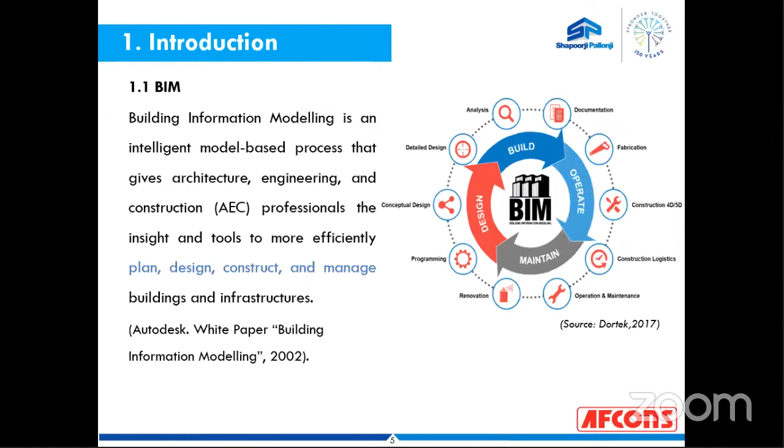Okay, then these 3 letters, BIM. I would like to explain the 3 letters BIM in brief detail. B stands for building - it could be residential, commercial, infrastructure, or healthcare buildings. It might be an infrastructure project, commercial project, or residential project.

Coming to the information, in our construction project there is various information. For example, spatial information, like at what coordinate your project is placed, the dimension details of various sections. For my current project, Samruddhi, there are viaducts - so what are the details of the bridge, what is the size of pier, foundation details, which components contain which kind of material, and quantities of those materials. If I have a foundation, how much quantity of concrete and steel will be there - I can provide these details to the model itself.

Then schedules - usually in a construction project we prepare schedules using Primavera, MSP, or sometimes Excel. Those schedules can be linked with your model, and based on your schedule execution, your model will simulate the construction process virtually to you. Then there are various elements like beams and columns - that element information is also there in the information model.

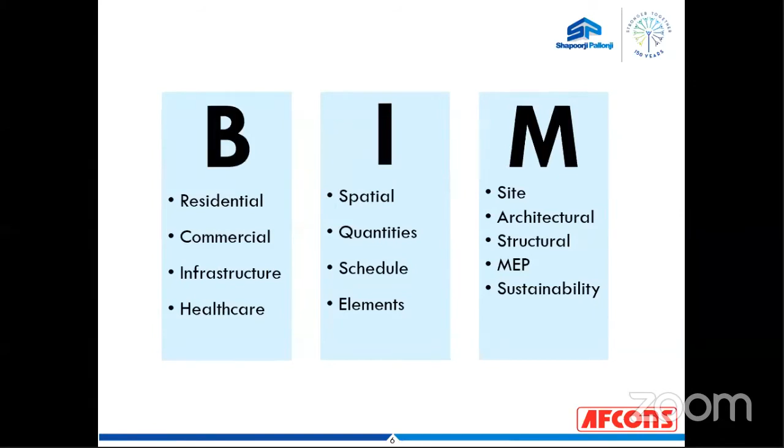Before starting any BIM project, one should know three fundamentals of BIM: levels of BIM, LOD, and dimension. I will start with the levels.

Levels are the maturity of the process as we are adopting a BIM process. So someone might ask you up to what level you are working. If I say I am working on level 2, what does that indicate? And if many of you are reading about BIM, you might read that industry is working on developing level 3 BIM. So what is all that about?

We'll start with level 0. Somewhere around the 1990s it started, and it was basically a 2D CAD based process. Drafting was done using 2D CAD, and the circulation or sharing of all those drawings and details was done using printed papers only. There was no electronic availability at that time. Then after that we evolved.

Coming towards the 2000s, at the start of 2000 we developed level 1. In level 1 there was 2D drafting and 3D CAD models. These were CAD models, not BIM models - there is a difference between them. CAD models were used just to represent how the structure would look in 3D, and data sharing was done using electronic sources like emails.

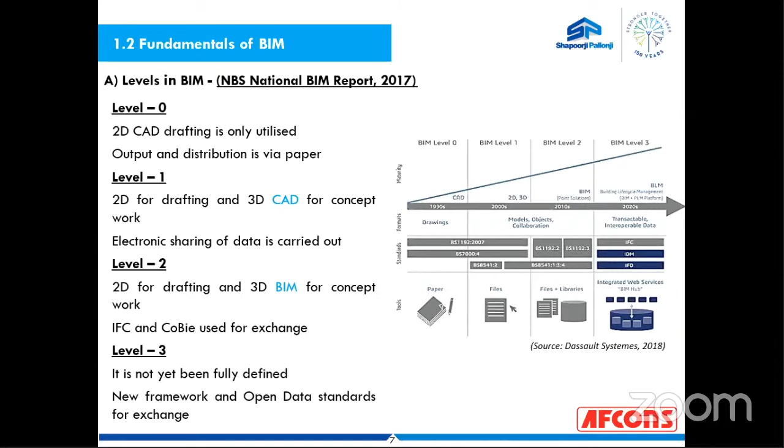Moving towards our next fundamental, there is level of development. Levels indicate maturity, while level of development indicates precision level - up to what precision one should rely on the model. As I have written here, LOD is a BIM representation that represents the precision level of the model.

LOD represents the precision level, and it is used to measure the service required. If I tell someone that I have prepared the model up to LOD 350, that person can extract quantity details, dimensional details, and location details from that model, as the model contains various information with it. So basically, what information should be derived from a model and up to what extent - this LOD specification will show you. The LOD specification ranges from 100 to 500, and in simplest terms, it defines what kind of data can be derived from a model and what is considered correct.

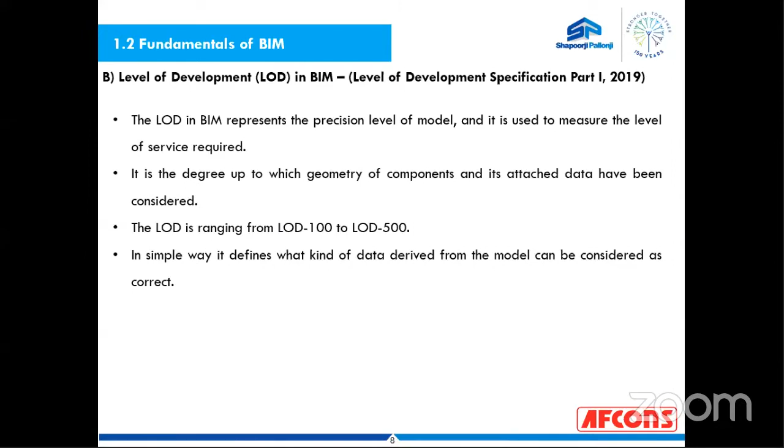Okay, so in detail, various LODs are here. For LOD 100, we generally call it a conceptual model. There is no much difference between a general CAD model and LOD 100 conceptual model, because only general details are provided to that model. No graphical or non-graphical information is attached to that model. Then coming towards LOD 200, graphical details are attached to the model, along with a few other details. So this is a schematic design model.

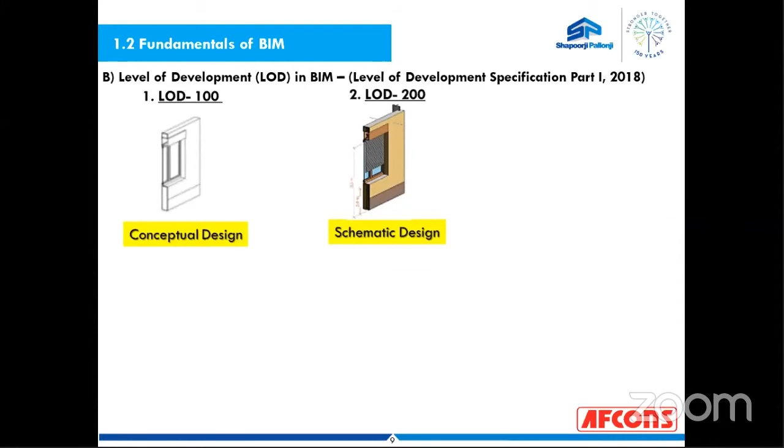Then detailed design, LOD 300, deals with all detailed design aspects. I'll be covering these sections in the upcoming slides - this is just a brief guideline to you all. Then LOD 300, as I said, is detailed design. Then 350 is for construction documentation - there is no much difference between LOD 300 and 350. Then LOD 400 will provide you the fabrication and assembly details.

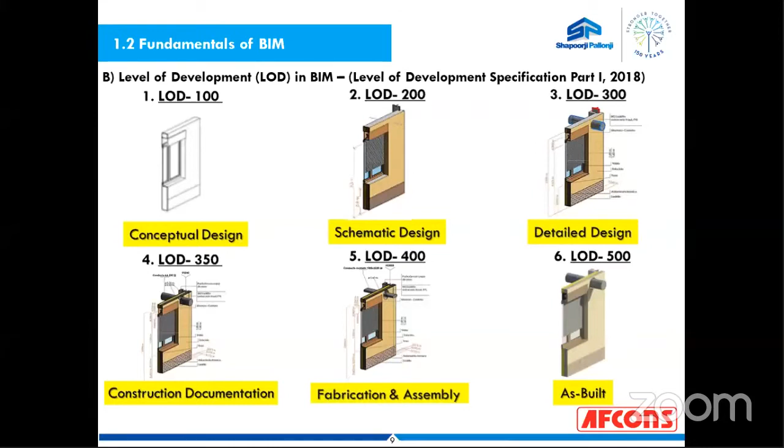And LOD 500 will replicate your as-built model. When you construct your model on the actual construction site, how it will look and how it will behave - all those things can be simulated based on LOD 500 models.

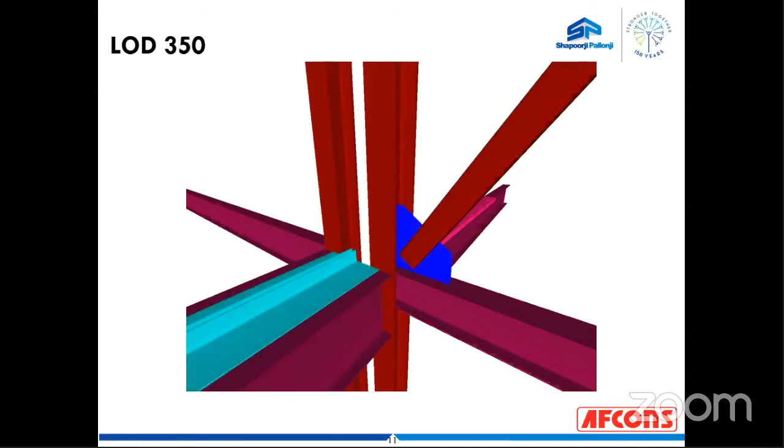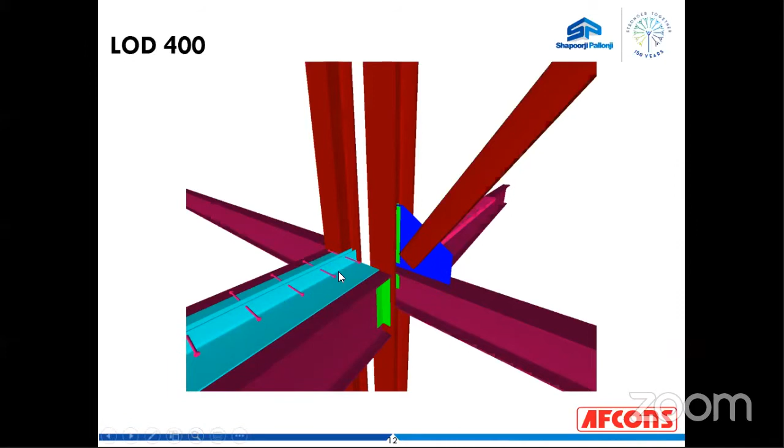Now I will go into a brief detail about these LODs, because LOD is the most important thing one should know in a BIM process, since understanding a BIM model requires LOD details.

Okay, so what is LOD 100? It is just a graphical representation - it represents how your model will look, whether it's a rectangular structure, a circular structure, or a hollow circular one. The parameters like area, height, volume, location, and orientation are imprecise - they are just representations, not actual or rough values, just representations. So it is a very rough consideration.

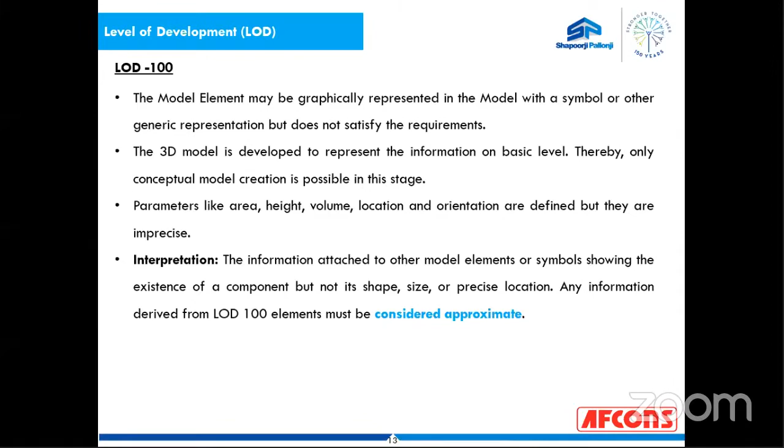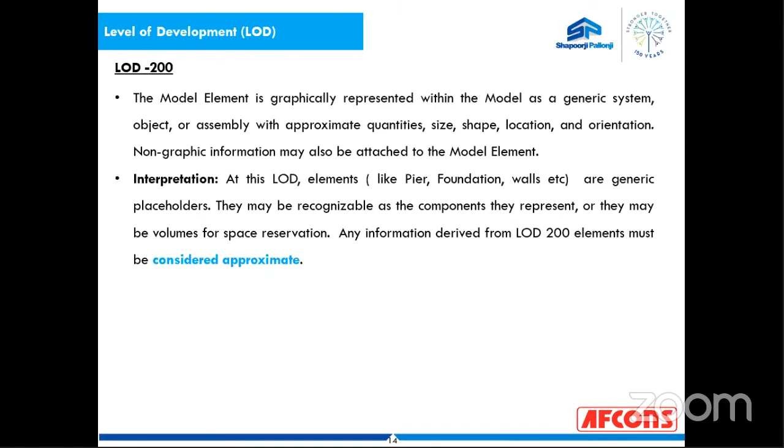Then moving towards LOD 200 - this is a graphical representation, along with non-graphical information like dimensional details, which can be attached to the model if you are developing it up to LOD 200.

Then LOD 300. In Indian industry, currently we work up to LOD 300 model specification. So what is there in LOD 300? It represents graphical information and specifies that quantity, size, shape, and location are precise. You can derive the quantities from this LOD 300 model.

If you have developed a BIM model, I'll give you an example. Consider I have developed a BIM model for a G+1 residential building, and I am preparing the quantities for that model. So if my model is up to LOD 300 maturity and precision level, I can derive the number of screws required for fixing the handles also. So this much precision it works - you can find out the precision up to this level.

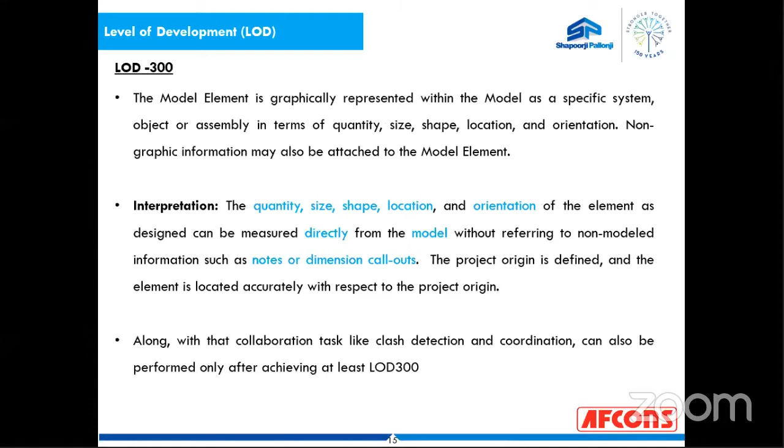And in BIM, there are various disciplines like architectural, structural, and MEP. All those models have spatial coordinates - my plinth level will be up to a certain height, my sill level will be there, my slab up to a certain height, and my AC duct is also passing through the same level. So consider if my structural beam and my AC duct are contradicting or colliding with each other - in 2D drawings I am unable to find that out, but in 3D BIM you can perform clash detection and find and mitigate those clashes at the design level itself. So if you want to perform clash detection, you need to at least achieve LOD 300 specification.

Then this is a representation for LOD 300, 350, and 400. I will be representing an example for the construction industry, showing how it will look at 300, 350, and 400.

So this is a column. This is a 2D representation, frontal view of a column. This is how it looks like in LOD 300 specification, and this is what it looks like in 3-dimensional. It is a 2-dimensional BIM model, and this is a 3-dimensional BIM model for the column.

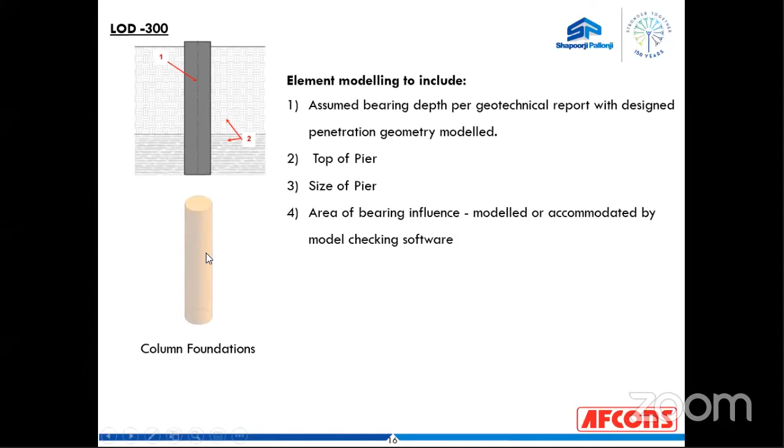Now moving toward LOD 300, these are examples of a T-beam and an I-Girder. I will share this presentation with all of you so you can read this information about what elements should be included in a 300 model. Currently I am not going into much detail, but based on these representations, you can see what details are there. All dimensional details are there.

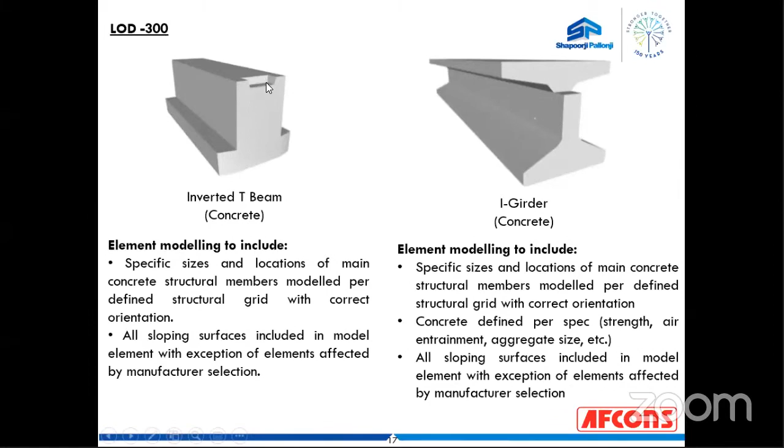There is a haunch provided, and it is properly covered in the LOD 300 model. Now, once we've completed LOD 300, moving toward LOD 350, there isn't much difference in detail between LOD 300 and 350.

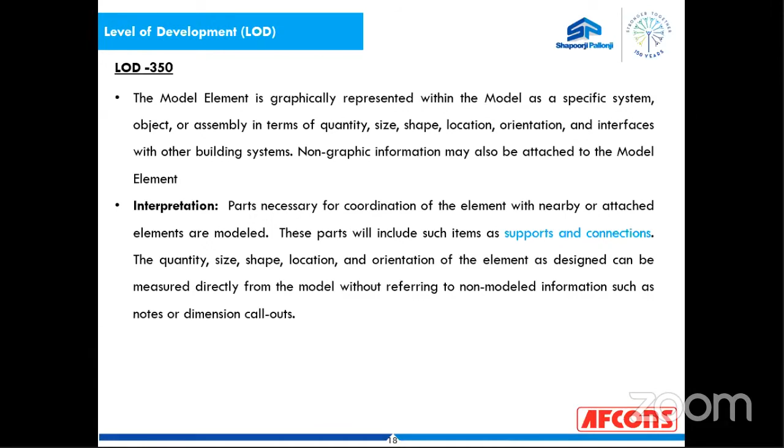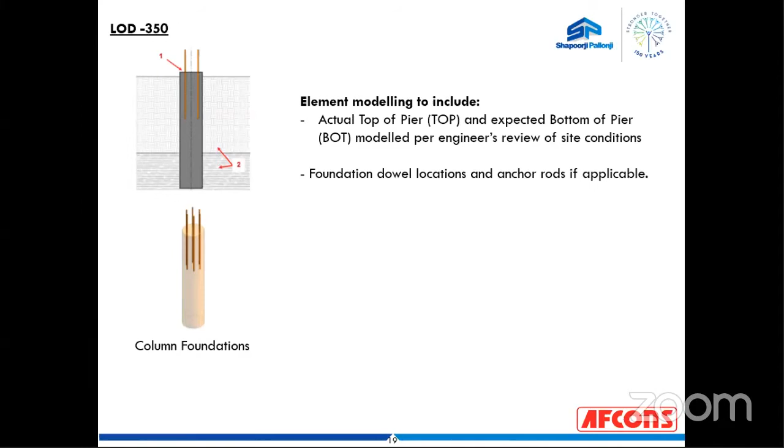As I said earlier, only the support and connection details are additionally provided in LOD 350. So a LOD 350 model will look like this. Previously, when I showed you the LOD 300 models, the rebar and reinforcement details were not visible there. But once we reach LOD 350 maturity, rebar details become available.

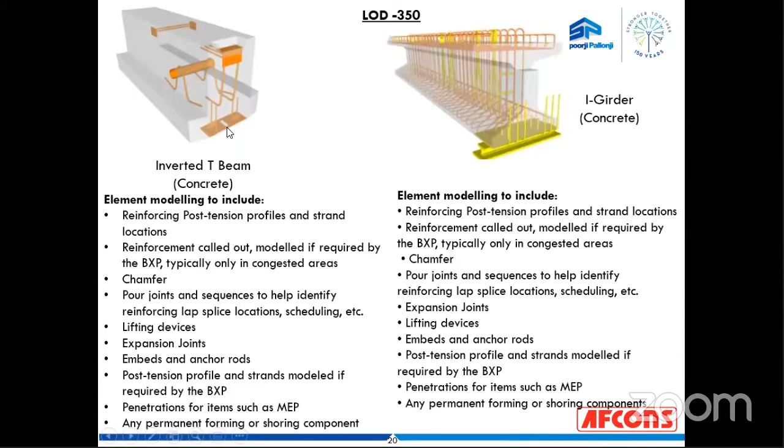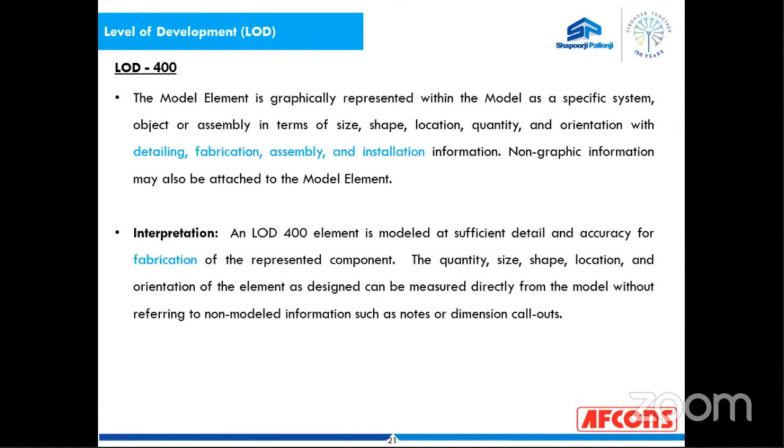Now moving toward our next point, LOD 400. After LOD 350 with all those details, what is there in LOD 400? In LOD 400, as I said, fabrication and assembly details are there.

So the LOD 400 model will look like this. Previously, stirrups, vertical reinforcement, and tie bar details, binding wire, and fixing details were not there.

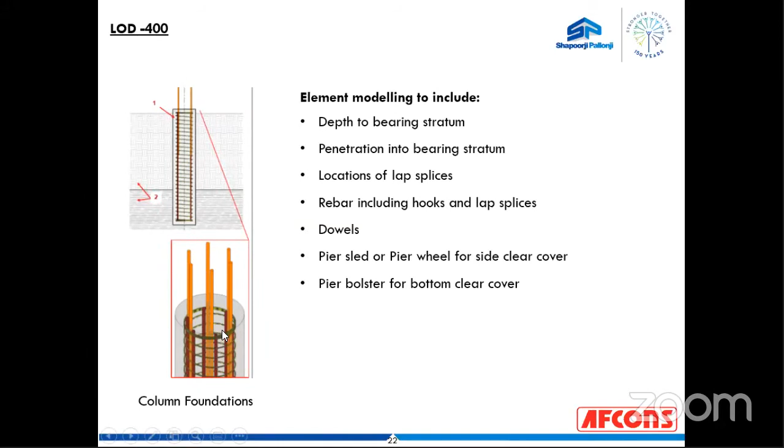But assembly details, all those things, are now covered in the LOD 400 model. You can also see fixing and supporting reinforcement, with assembling arrangements totally shown in the 400 model.

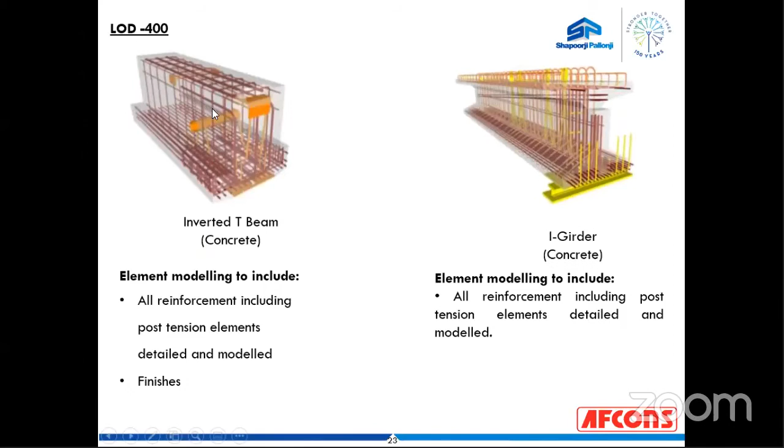Then, as I said, LOD 500 is an as-built model. LOD 500 models are generally used for operation and maintenance purposes. Currently, all over the world, LOD 500 modeling is still in its conceptual stage.

No one is implementing it in a full-fledged way. LOD 500 is not being implemented full-fledgedly anywhere in the world, but only a few specific special projects exist where LOD specification up to 500 has been achieved.

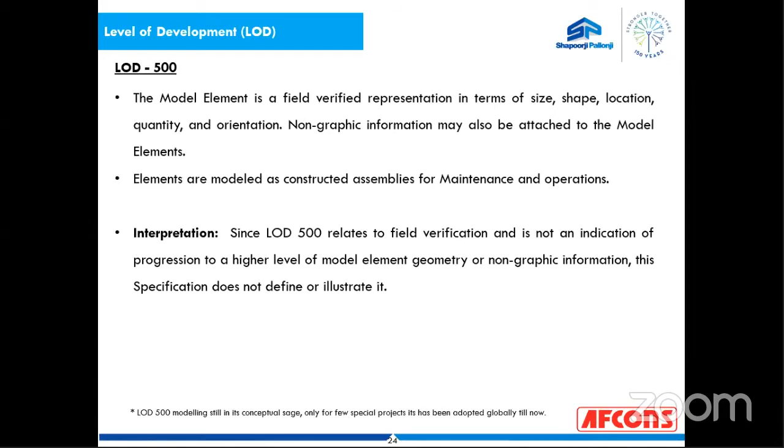Now, two fundamentals are already covered: level of BIM and level of development of BIM. Now, moving toward the dimensional details of BIM, this is the last fundamental one should know about BIM.

So currently there are 7 dimensions of BIM. Some researchers define it as up to 12 dimensions also, but for me and most researchers, 7D is sufficient to cover all available aspects of the construction industry currently.

Initially, everyone knows about one dimensional, two dimensional, and three dimensional. So I shall start with 4 dimensional. What is a 4 dimensional BIM model?

As we have seen, we prepare a 3 dimensional BIM model. So in a 3 dimensional building information model, a building column knows it is a column, a door knows it is a door, and a wall knows it is a wall.

So when I am placing a door over a column or a slab, it will not allow me. It will show that this element cannot be placed because it cannot be placed there.

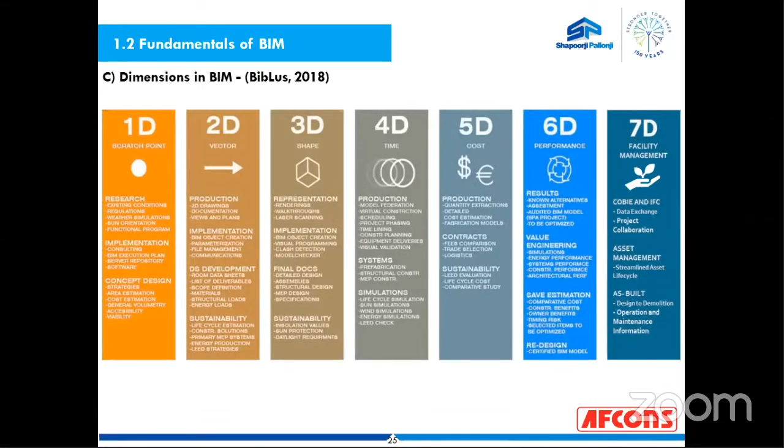This is used basically for operation and maintenance purposes. Because I have installed certain assembly, my client will not know what brand it was, what specification it was, and if he wants to replace it after 10 or 20 years, he might not know the exact details. So in 7D facility management, all those specifications will be attached to the model, so that during the operation and maintenance phase, one should know about the details.

So that completes all those three fundamentals. Now moving towards our general BIM workflow. This was part of my research, my academic research, developed by me. It represents a general workflow.

We will start with implementation. Imagine any client has decided to implement BIM. In the beginning, he needs to prepare an Employer's Information Requirement, EIR. EIR is a contract document for BIM. Like for executing a project, we develop a contract document, so for executing BIM, we develop EIR. Basically, EIR is a contract document.

Then BEP, BIM execution plan - BEP is an answer to that EIR. The client provides the EIR, and based on that, the contractor or the party who will be executing the work will prepare a BEP, BIM execution plan, in which he will be satisfying all the requirements of the client. I will go into EIR and BEP in detail in upcoming slides. For now, just consider EIR as a contract document of BIM and BEP as the answer to that contract document.

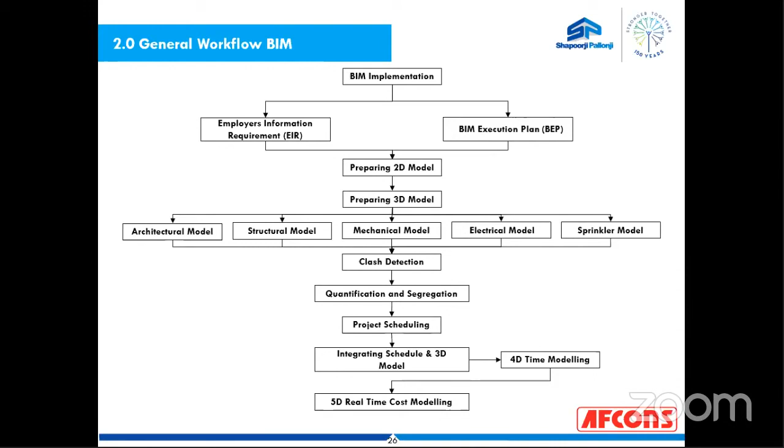Going into a little more detail, because the BIM workflow is very much essential, many of my connections ask me on LinkedIn, sir, what is the general workflow for BIM? How should we understand the process? From where should we start? What should we do first? So this is the workflow while working on BIM.

After that, this is EIR. As I said, what is EIR? EIR is a pre-tender document setting out the information to be delivered, what information is to be delivered, and what standards and processes to be followed. Currently in India, for preparing EIR or anything else on BIM, there is no standard specification. This is one of the major reasons why BIM is not being implemented in India.

If the government of India made it mandatory to use BIM, it will be very good for the infrastructure and building industry because it will increase efficiency and productivity. For preparing EIR currently, since most of our standards are derived from British standards, in India we follow UK PAS 1192 second part, published in 2013. Also, BS EN ISO 19650 we follow for preparing EIR.

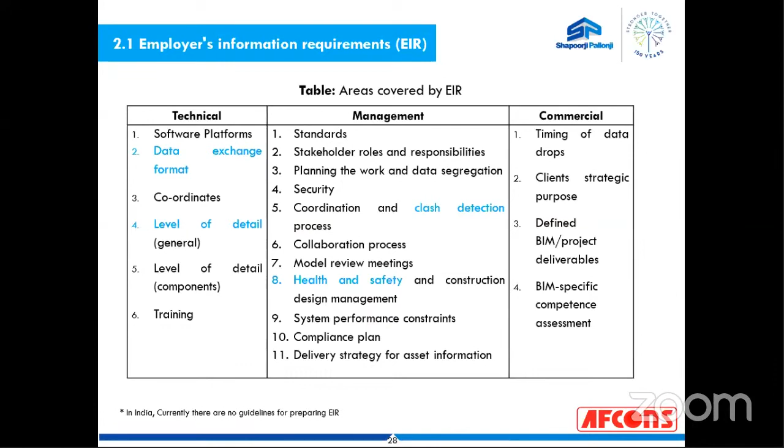So I think everyone is clear with EIR. So I am moving towards my next part, that is BEP.

As I said, the BIM Execution Plan is a plan prepared by the supplier or contractor, and it will show how the modeling aspect of a project will be carried out - how the client, contractor or consultant will be doing the modeling, what details, coordinates, models, softwares, and LOD specification levels they are considering. All those things you will be able to see in the BEP.

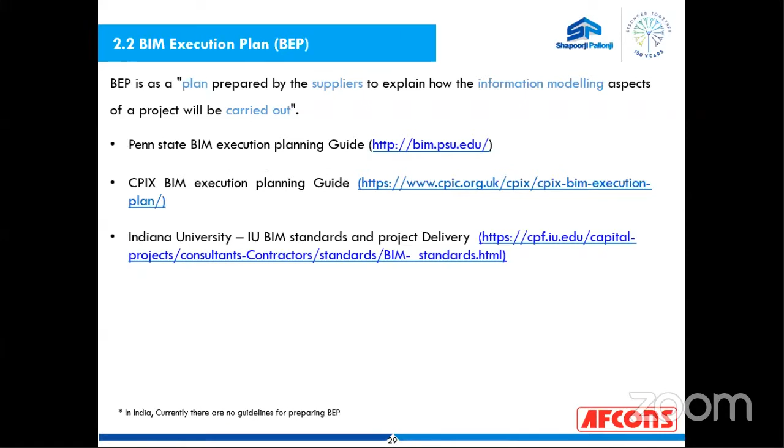And as I said, it is an answer - BEP is an answer for EIR. Again, I have provided some links for studying about BEP. This is the first link, the Penn State BIM Execution Plan Guide. It is one of the oldest guides available, and it is revised every year, and it is very good if you want to prepare a BEP.

Then moving towards the next section, model preparation. As I said, BIM is a process. Again and again I am concentrating on this because when I interact with my Indian colleagues or my LinkedIn connections or professional networks, they consider building information modeling as a software, and they think Revit is BIM. No, no, no - Revit is not at all BIM.

BIM is a process, and Revit is one of the software on the BIM platform, as Revit is most used currently in the Indian construction industry, so people think that Revit is BIM. No, Revit is not BIM, and it is very necessary to provide LOD specification to your model. I have prepared a model using Revit for all you guys to represent how a model looks like.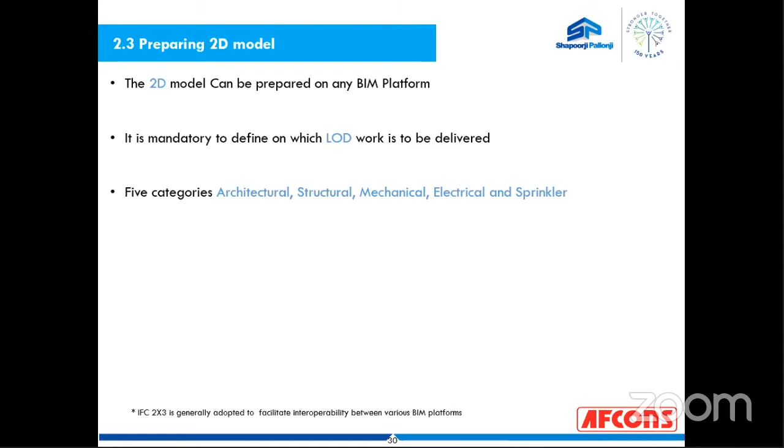So I will be showing those models after I discuss this process. Then again, for the 3D model, there is no much difference between 2D and 3D model. Once you are done with your 2D model, it is itself a 3D model. You just need to change the view in your software.

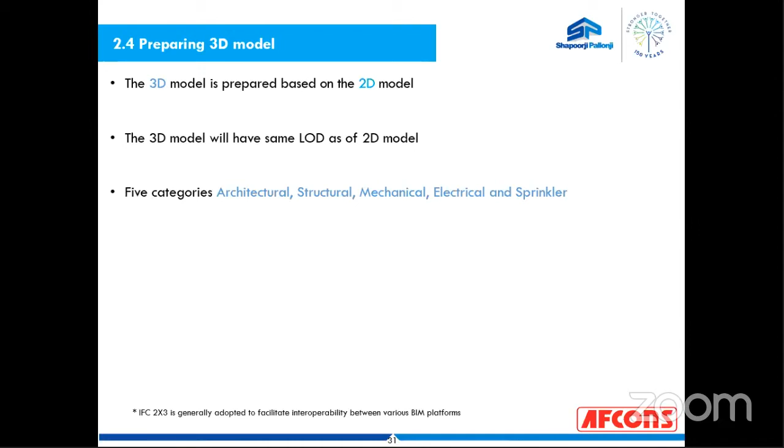As I said, there are 5 categories: architectural, structural, mechanical, electrical, and sprinkler. Then there are various disciplines of BIM, as I said. So these are the models one by one based on this discipline.

This is the architectural model, a 2D architectural model. As you can see, I have prepared this using Revit 2017. On BIM, we work on levels, like ground level, level 1, level 2. You can consider it like this.

In conventional CAD based process, we use layers, we work on layers. If you are good with AutoCAD, you may know that there are layers in AutoCAD. Likewise, there are levels in BIM.

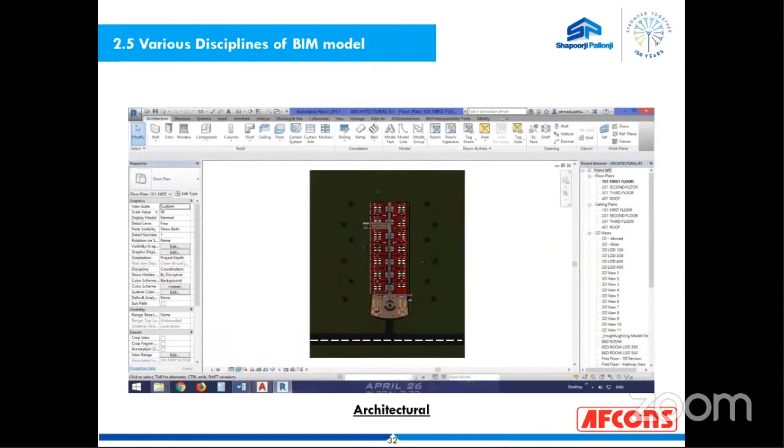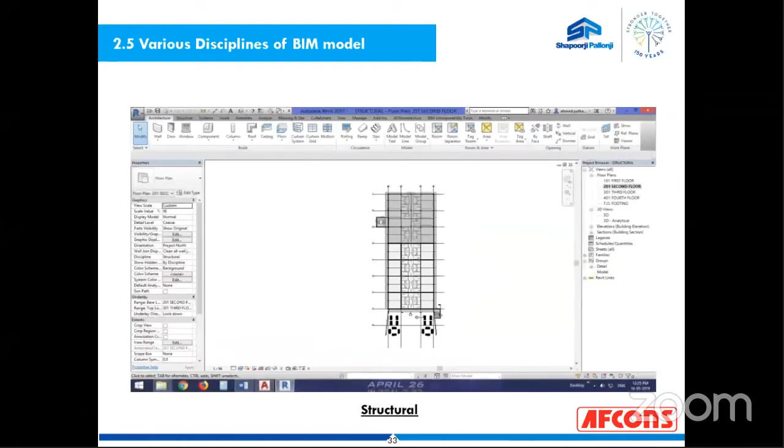Then this is a sprinkler model. All of you might have seen the firefighting system. The firefighting system consists of various piping arrangements. So what happens when my mechanical, electrical, and plumbing system is there? As my plumbing system is included in my MEP model, there are pipes.

So in Revit or any BIM software, while doing modeling, it is difficult to differentiate between those models. So what we do, we prepare those models separately in separate files, and after that we view all of them in coordination view. Here you can see I have opened it in coordination view. So in coordination view, you can link all those models based on their XYZ coordinates. The models will place and get over each other, and I can find out the conflicts.

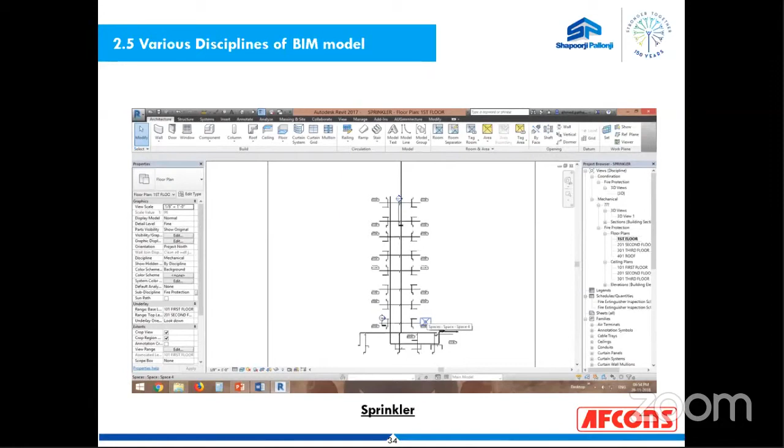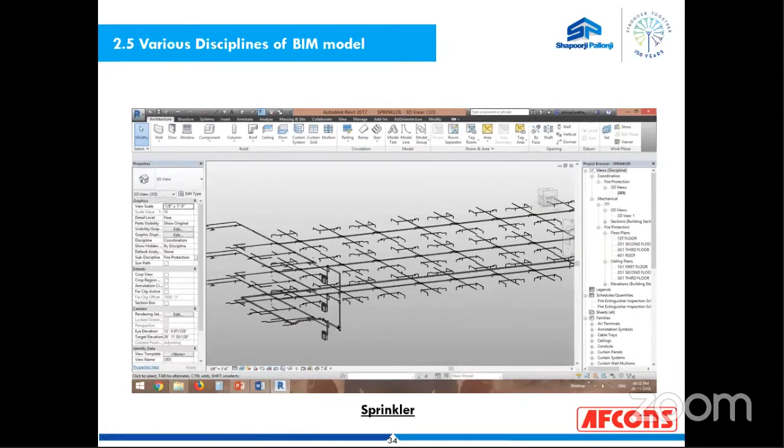So for differentiating between MEP pipes and sprinkler pipes, generally in industry, MEP models are developed separately. Then again, this is what a 3D MEP model looks like. If you zoom on this, there are sprinkler arrangements here. I will be showing you a 3D walkthrough of this model, so you will be getting an idea of all those things.

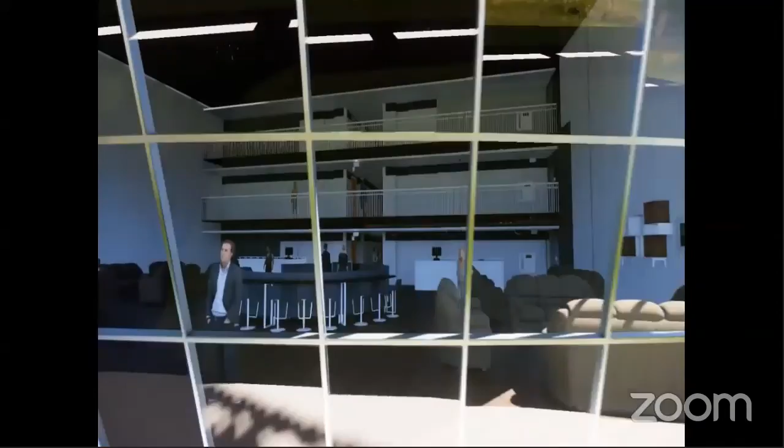Then what I was talking about, this is the 3D walkthrough of that model. I think all of you are able to see this. So I am moving towards my area. This is a general or hotel building. All those details I have provided.

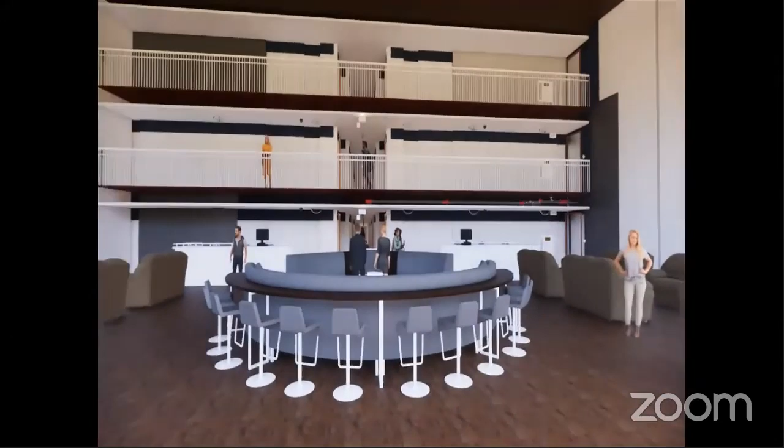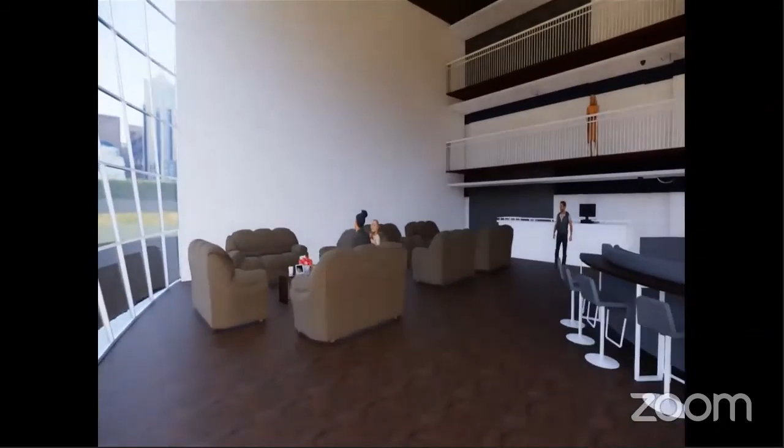The color of all those materials are based on their specifications and colors which I have provided. As you can see, every detail is visible there. Sunlight, as I said, heating and cooling analysis, and sun path analysis.

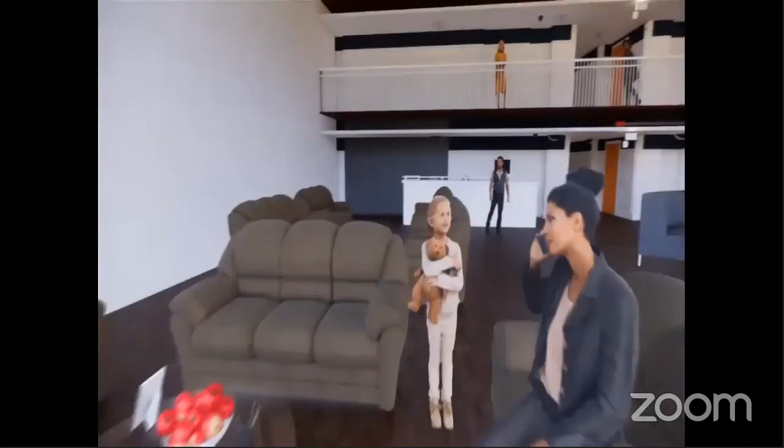So it is replicating natural sunlight. If I construct my building, how my natural sunlight will enter my building, at what time lights will be there, and what time I will be needing artificial lights, all those things will be there.

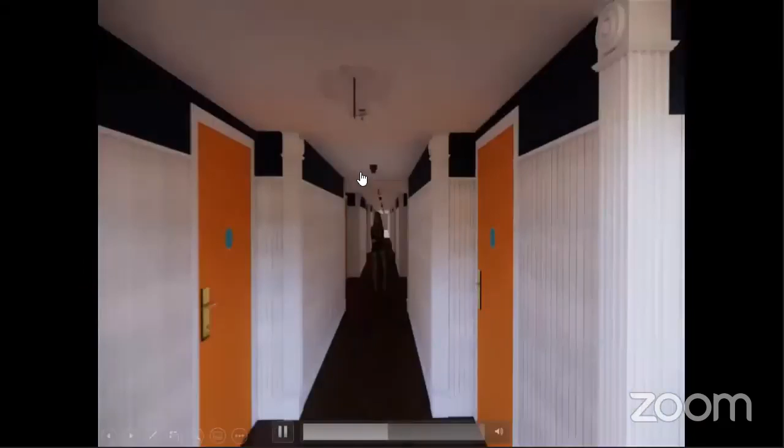Here, if you can see, these are my sprinklers which I have attached, and these are my smoke detectors, these are my lights. All those details are there. Okay, then I am entering one of my rooms.

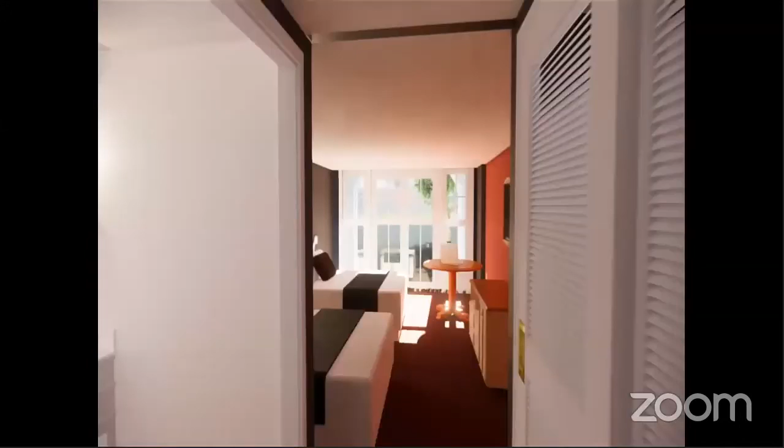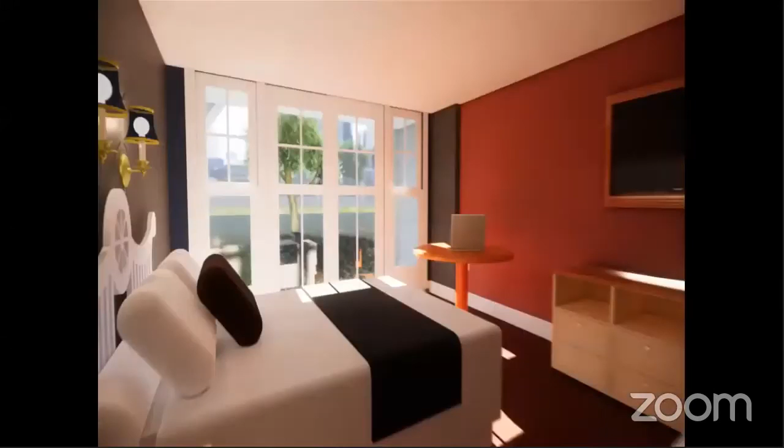See, this is how a LOD specification model looks like. Here all the arrangements are there. Coloring, quality, sunlight analysis, all those things are there.

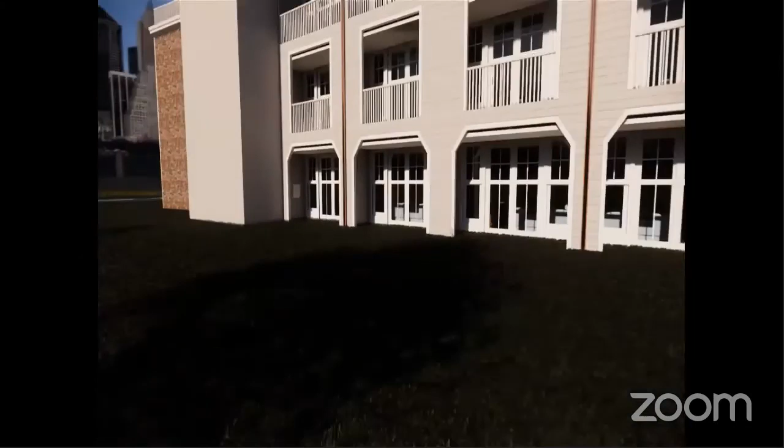So now we are moving towards our terrace. As I said, these red lines are arrangements of those sprinkler systems. So now we are moving towards our terrace, so you will be able to see all those firefighting arrangements.

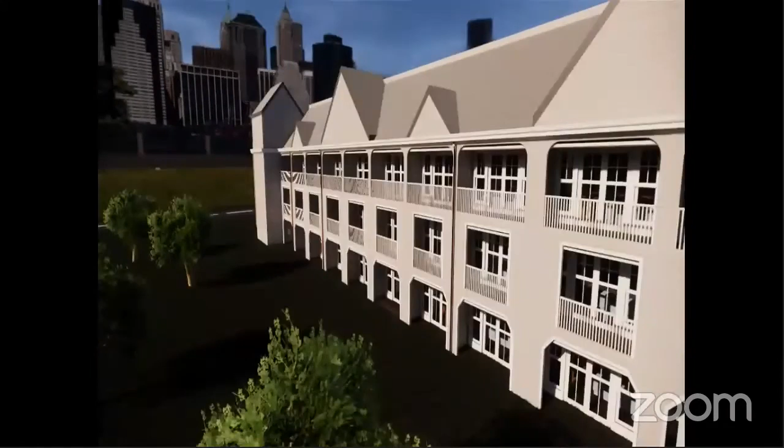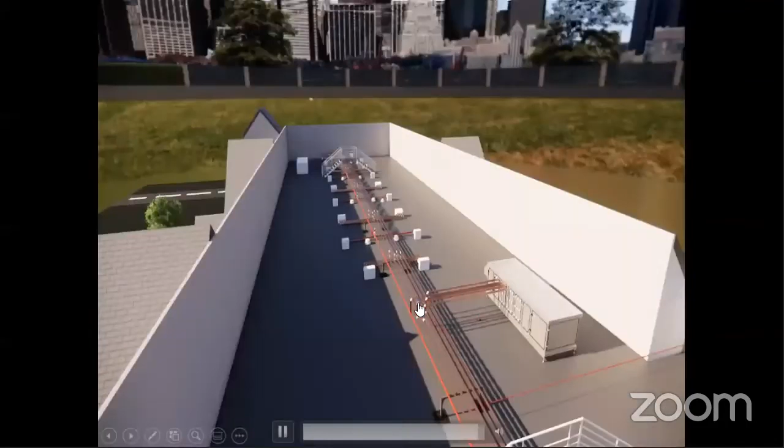Here, once we reach the terrace, generally all our firefighting arrangements will be installed at the terrace. So here you can see, this is the sprinkler conduit, these are the pipes, all the pipe arrangements are there. So all these details are there, and all those models are developed separately, and they are linked together in a coordination view.

And now, how it looks like. See, Afcons infrastructure is working on BIM currently, and previously also for various projects like Nagpur Metro, Ahmedabad Metro, and if you may have heard, the Chenab project in Kashmir. It is one of our special projects and is our flagship project. For Chenab, we have used this modeling.

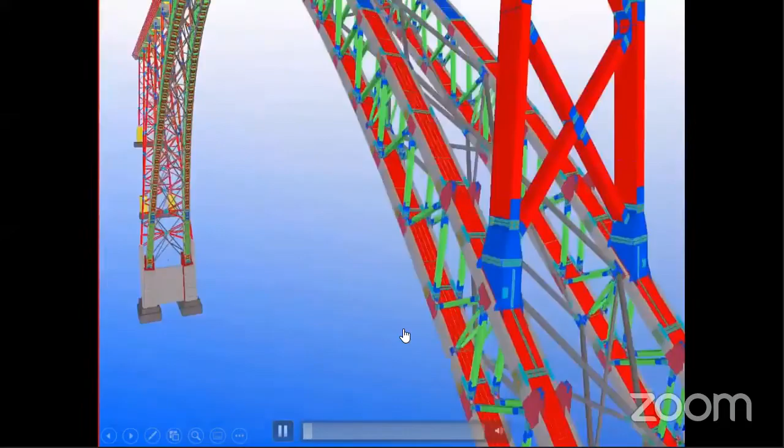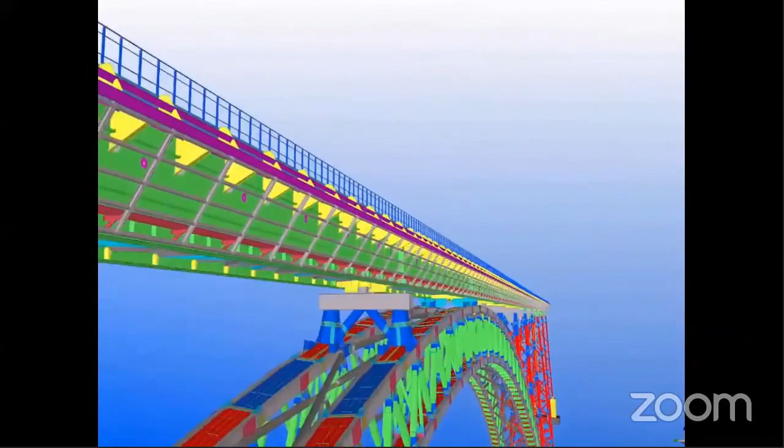See, this is all my joint arrangements, where I should place my rivets, my bolts, where the welding arrangement will be, where are the bracings, what are the rafters, railing arrangement. All those details are already simulated in detail before the actual execution, and we are executing the project. And I am very happy to inform you all that we are matching both of our sides with zero error using this BIM technology. So it is helping very much.

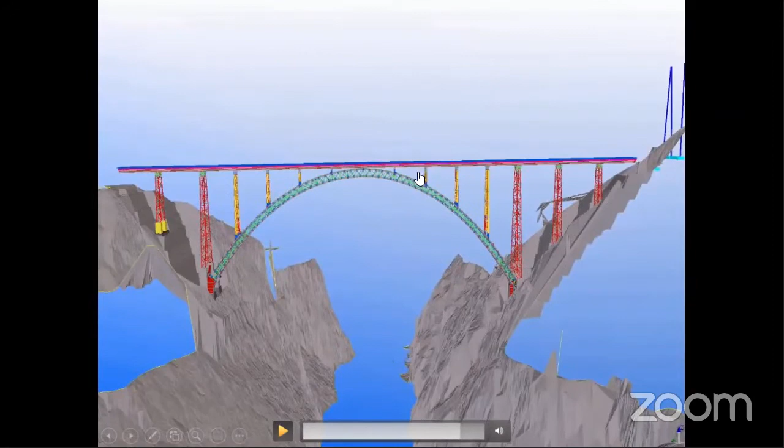As I said, there is a deep valley. Here is the deep valley. We are working from both ends, from here to here. So the left half portion, we started from here, and the other half, we started from here, and we matched it with zero error. So it is a very good thing for us.

Moving towards next, once our model is good and all the modeling is done, we need to check if there are any clashes between my various disciplines, like structural, architectural, MEP, all those things I need to check. So for this, I perform clash detection. There are two types of clash: hard clash and soft clash. But before going into clash detection, one should understand what a clash is.

Clashes occur when the spatial coordinates of the building conflict. Why am I mentioning spatial coordinates? We have three-dimensional coordinates X, Y, Z. So if my plumbing ducts or pipes are passing through my walls, not through the openings I have provided, then they are conflicting in their spatial coordinates. So they might conflict with each other, and during execution, I may need to do rework.

So to avoid that rework, I will perform and simulate the clash detection at the design phase itself, and I will resolve all those clashes. Based on that, my GFC drawings will be prepared. Due to this, the rework at actual execution will get reduced or completely eliminated.

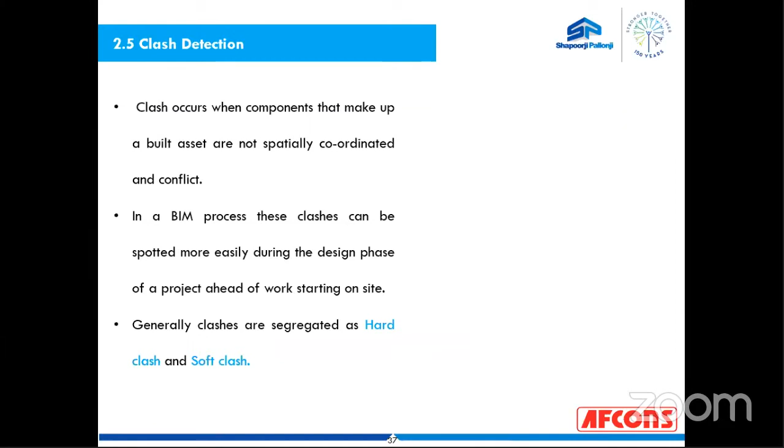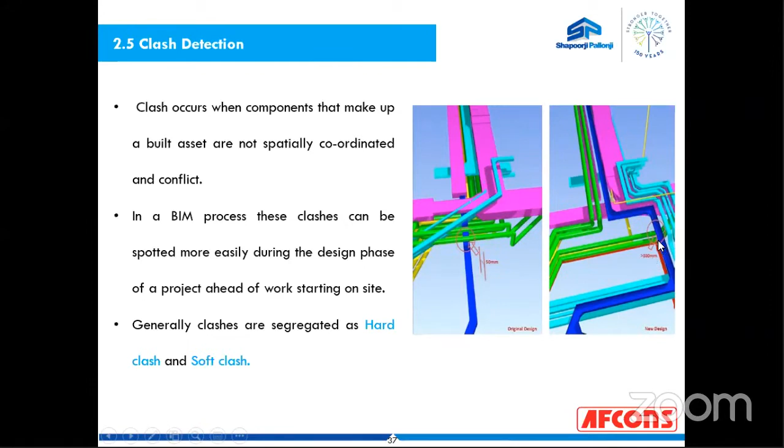Here you can see my pipes are going below my ducts, so I need a clearance as per drawing of 100 mm, but it was only 50 mm. Then I performed the clash detection, found this out, and prepared a new design by implementing the revision, and now it is 100 mm. So this is a soft clash.

This also happened previously because we used to prepare 2D models. In a 2D model, it is very difficult to imagine all the pipes considering their levels, details, and coordinates. So generally during execution, it was a common practice that you need to rework or redesign. But if you adopt the BIM process, it will be eliminated completely at the design phase itself, so a huge amount of cost can be saved.

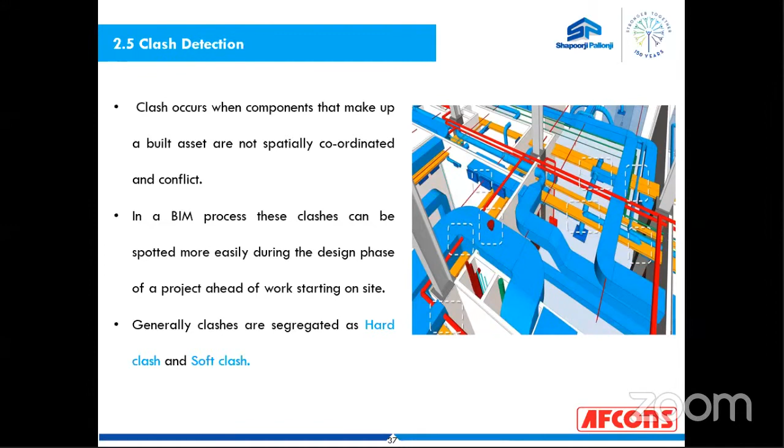Again, once our clash detection is done, we do quantifications based on those quantities. We prepare our time cycles, and based on those time cycles, we prepare our construction schedule. So that construction schedule will be mapped with our model.

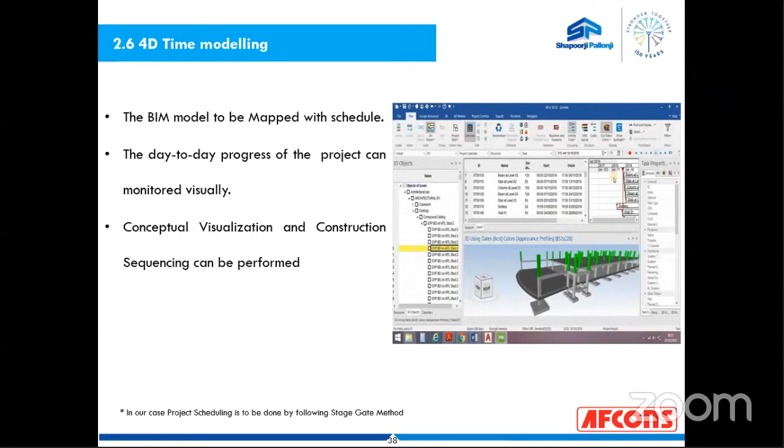In our project, the Nagpur Mumbai Samruddhi Super Communication Expressway, the project scheduling is to be done by the stage gate method. There is a task for all of you: study about the stage gate method. What is a stage gate? Read about it and you will get to know in detail. So the project schedule will be prepared using stage gate.

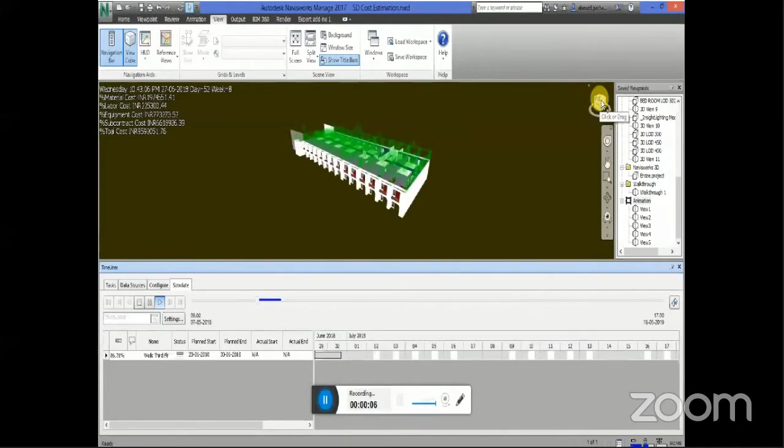This is how a 4D simulation looks like. If I pause the video at a certain time frame, you can see here all the duration details, my day 52, week 8. This is the progress I am getting, and on that particular day this much progress I should get. So while preparing the monthly work plan, weekly work plan, and daily construction plan, these models will be very helpful to find out what elements to be tackled and how to execute them efficiently. So for that, 4D models can be prepared. This is a quick preview, I have put it on 10x, so it is moving very fast.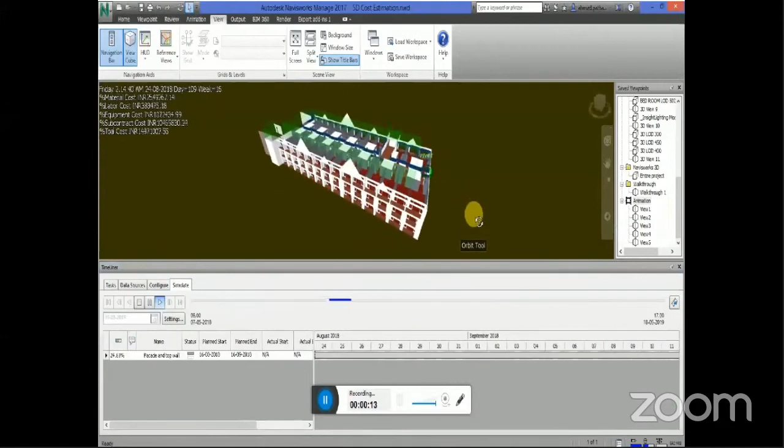Okay, so now my final finishing arrangements are coming - my walls, my windows, my...

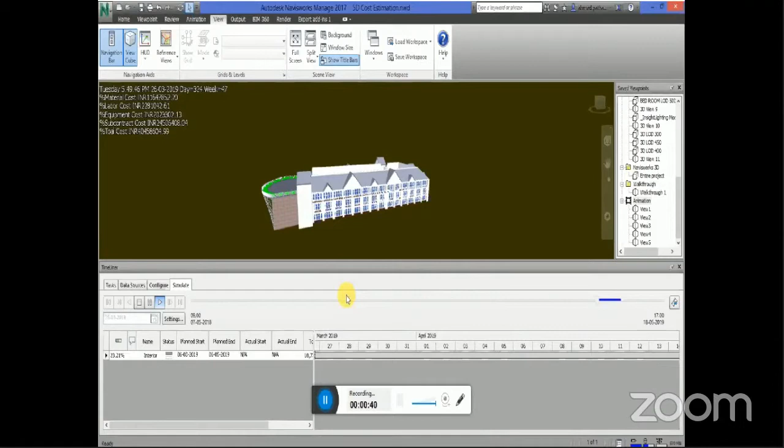So moving towards our 4D simulation, it is done, completed. This is our 5D simulation. Okay, see how our 5D simulation will look like. I have paused my video somewhere here.

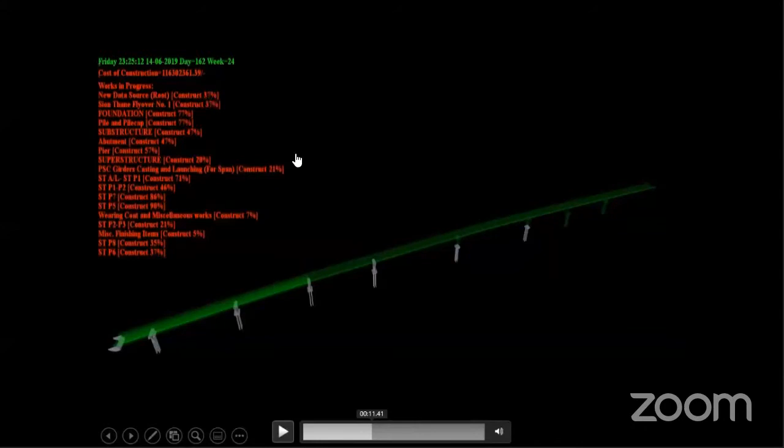So until now, I have completed my pier work. My pier cap is ready. All my I-girders are in place. My deck slab is in progress. So on Friday 14th, day 162, week 24, this work progress has already completed 37%. And for executing this work, this much is the cost I have incurred.

Same, likewise, I have assigned the cost. I can prepare the turnover also. Generally, in EPC project, we deal with the turnover - how much cost have generated for this much turnover. So cash flow statements, all those things.

Considering these models, all the analysis - value analysis and S-curve generation - can be done, but it will become a very long session. Reason why I have not covered them. If in future I get an opportunity to present to you all guys, I will cover those also.

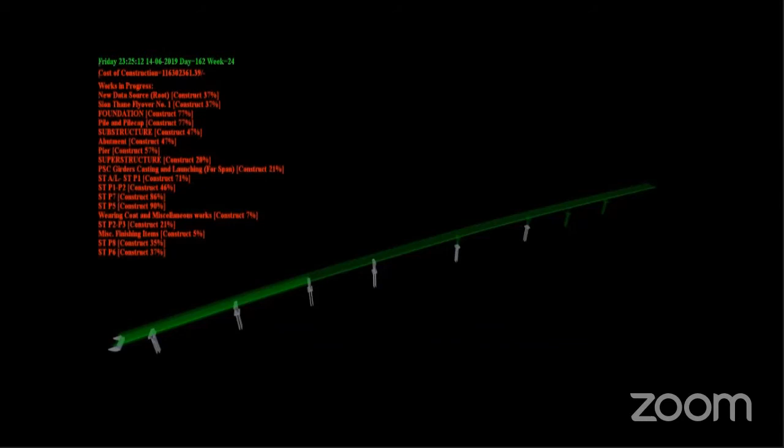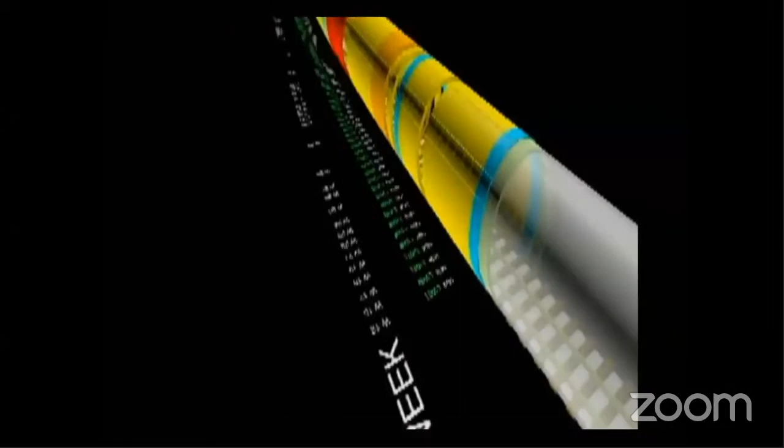Okay, as our current project is a tunnel project, we are constructing the widest tunnel in Maharashtra. It is a twin tube tunnel, and the total length of the tunnel is about 16.4 kilometers.

So this is a representation of 4D simulation of a tunneling project. This is not for our project, some other project. This project is done by TBMs. So while you are using TBMs, the lining work will be a precast segment. So how the precast segment needs to be casted based on the site condition requirement, you can find it out based on this kind of simulation.

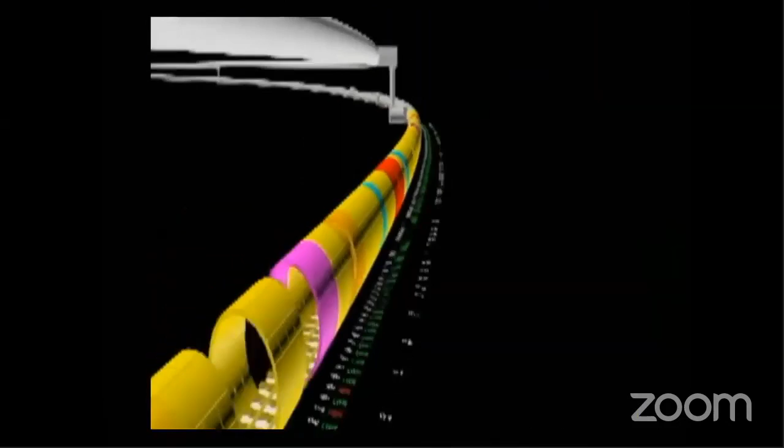I am playing this simulation. You can watch this - see, these yellow, red, purple colors are indicating some work in progress or completed. Green is indicating work in progress, blue completed, red critical. So likewise, the color scheme can also show various aspects, and this is how it is going.

Currently I am in some week, like week 19. So on week 19, I need to complete this much number of segments. On week 20, I need to cover this segment. All those things are there.

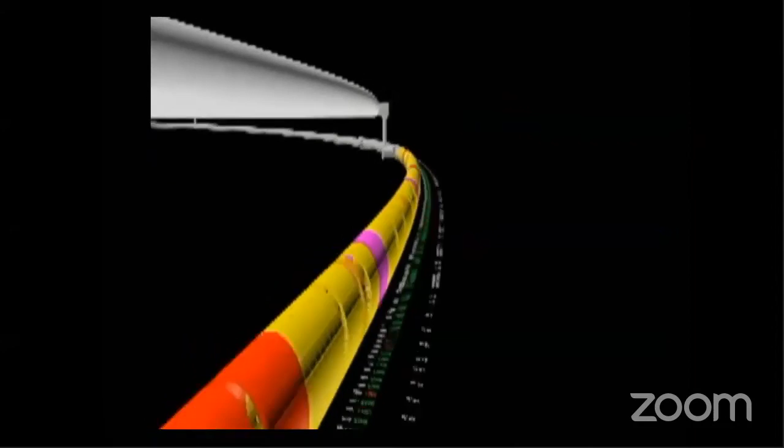Okay, so I will play it further so you can see a complete video. For various weeks, I need to complete this much program. It's indicating the cost part - I have kept it hidden here. I'm just showing the time scheduling, real-time time scheduling.

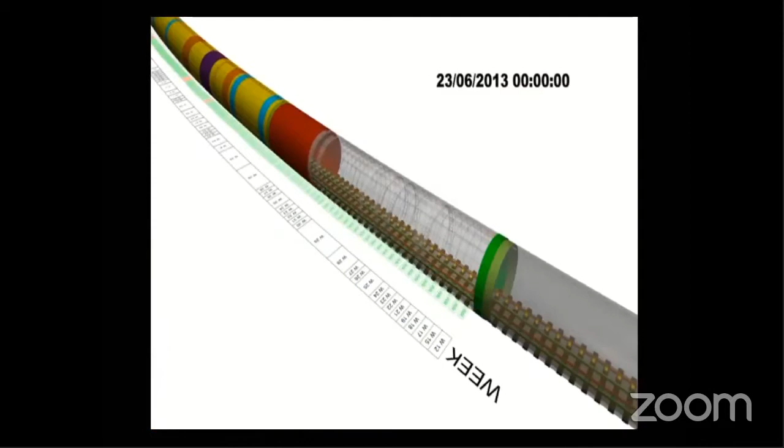Okay, so moving towards our next part. Now, BIM softwares - which BIM softwares should one use when currently working on a BIM project? For our project, Samruddhi Expressway, currently we are using these softwares for our building information modeling purpose. We are using Revit, Navisworks for Revit, for preparing the model - 3D architectural model, structural model.

Along with Revit, we are using InfraWorks. There is a software named InfraWorks for our viaduct and road part - we are using that. Then for detecting the clashes, we are using Navisworks.

Then Synchro software, it is provided by Bentley. As Autodesk is running behind BIM, the second in line is Bentley. Bentley is working very well towards BIM, and in the coming 5-6 years, Bentley will be the finest BIM provider all over the world, because Bentley is innovating. Autodesk has stopped innovating a little bit - it is lagging somewhere, but Bentley is working very, very well.

So I suggest one should learn Synchro software, because Synchro can cover up to the 4D aspect of BIM, and it can generate EVM, value analysis, and S-curves, all those details. But 5D cost simulation is not possible in Synchro - but they are working on it, and soon they will be adding that feature also.

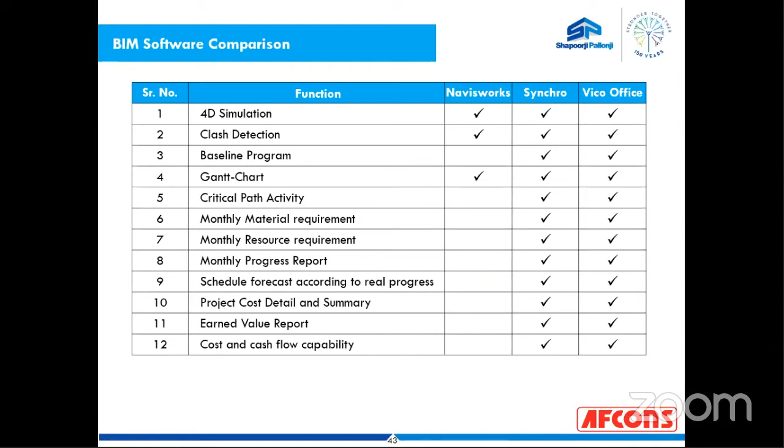Also, there are very potential risks while downloading pirated versions—your details might get leaked. So avoid them. Then this is the contractual condition.

Why I have included this slide—I just want to show you how much seriousness the Indian government is taking towards BIM. In our project, this is the contractual condition for implementing BIM. What are the important conditions?

We need to prepare daily basis progress in BIM, not a general daily progress report—in BIM we need to prepare it. We need to develop a high level BIM strategic document and execution plan. Our bill will be approved based on BIM.

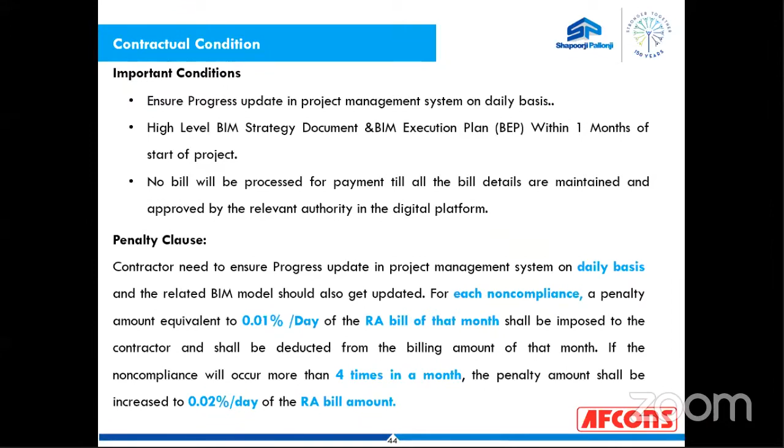Then again, there is a penalty clause if we are not implementing BIM—it is up to 0.02% per day, which is a very huge amount. So the government is taking this seriously.

Then coming towards our conclusion, as I said, my session will be about 40-45 minutes, and I have already taken my time, so I'll move towards my conclusion.

So in conclusion, from the owner side—because in the construction industry there are some good practices and some bad practices—I am just considering the owner side and concluding my session.

From owner aspects, BIM will reduce documentation error and omission up to 61%. Previously, fragmentation was there. Every detail was fragmented - design reports, drawings, specifications, information, quantities, schedules, all were different documents. But in a BIM model, you can attach all those details to the model itself. So after 10 or 20 years, for arbitration or any conflict resolution, I can directly extract those details from the model.

Also there are extra items. Many conflicts in the construction industry arise due to extra items. But if I have provided all the details in the model itself initially, no one can claim something was not included. If it's not included, it will directly reflect, and the proceedings for getting claims will be much shorter - in 2-3 proceedings one can get the award if all details are clear. Currently, details are not clearly available, and due to this the arbitration process gets extended up to 10 or 12 years.

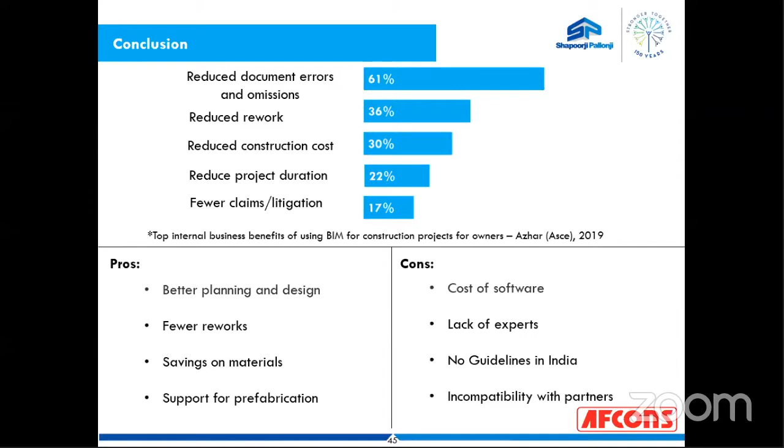The last disadvantage is incompatibility with the partners. It arises from this - as there are no guidelines, most of the partners or stakeholders involved in the industry don't want to work on BIM. Most of them still want to work on CAD and conventional processes. So there is an incompatibility. If government comes up with some guidelines, the incompatibility will completely be gone.